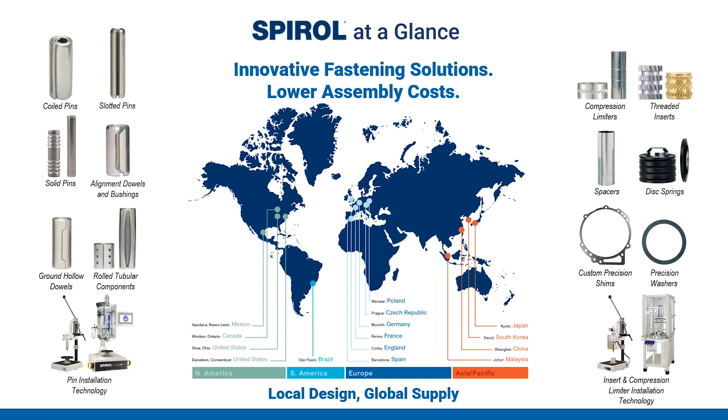To truly understand SPIROL, let's go back in time and relive the story behind the founding of our company. Herman Koehl, a German scientist and engineer, emigrated from Germany to the United States in the late 1940s. After his arrival, he worked for the US Air Force, where he was trying to solve a peculiar problem with fastening the turbine blades to the rotor on early jet engines. The Air Force tried to use bolts and nuts, dowel pins, and a traditional slotted spring pin, but nothing worked as the fasteners kept either failing or falling out of the assembly.

This was primarily due to the vibrations within the assembly, which caused the nuts and bolts to vibrate apart and fatigued the pins or enlarged the hole, resulting in the pin falling out of the hole. In a spark of brilliance, Mr. Kohl tried to take the spring pin concept of the slotted pin and take it a step further to provide more flexibility through coiling a thinner strip. The coiled spring pin's superior flexibility and shock and vibration absorbing properties preserved the integrity of the hole and held the engine assembly intact for the intended life.

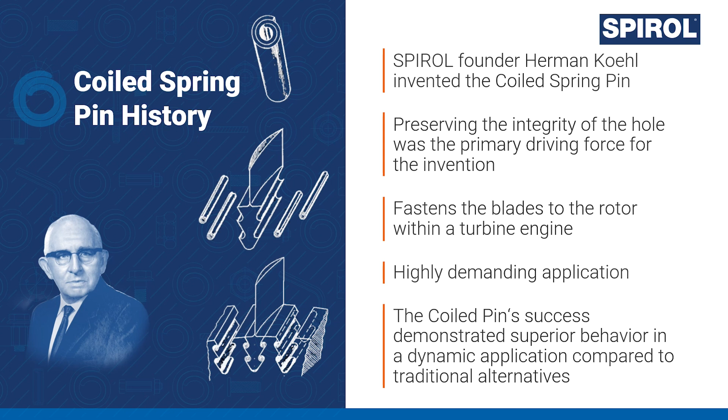After his time in the Air Force, Mr. Koehl took the coiled pin to the market, and the rest is history.

So let's first review the terms and concepts of dynamic applications. We're going to get a little bit technical, so I want to take a minute to explain these terms and make sure everyone understands them.

So what exactly is a dynamic load? Simply put, it is any load that changes over time. This can be either a pulsating force, imagine pushing and pulling onto something repeatedly. It can be a random vibration, like a car driving on a rough road, or it can be a shock or an impact, imagine a hammer hitting something. So when we're talking about dynamic loads, we want to have a complete picture of what is going on.

After determining the type of load, it can be further described by these parameters. Mean stress component, which is the average or middle value of the curve. Amplitude is the amount by how much it oscillates over time, or the peaks and valleys in the graph. And frequency, which is essentially how fast the load changes over time.

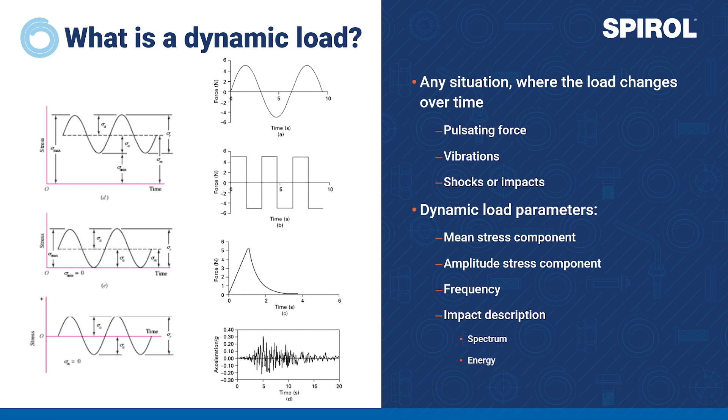And when talking about shocks or impacts, these are best described by how much energy they carry, which would be represented by the area under the curve, and their spectrum. Imagine comparing a hammer hitting an anvil versus a foam stick hitting a mattress. Both of these are impacts, but they have vastly different consequences.

SPIROL addresses dynamic loading in a wide variety of applications. Generally, any powertrain application, regardless of the industry, presents the need for products capable of performing under dynamic loading. Engines, transmissions, gears, axles, differentials, all subject installed pins to some form of reciprocating force or load.

Mining equipment is one example of an industry where pin joints are often subject to very high shear, impact, and vibration. Power generation is similar to powertrain applications, though machines designed for this industry are typically orders of magnitude larger. And due to the scale of these assemblies, SPIROL's wide variety of pins, up to 20 millimeters or 3/4 inch in diameter, are an important capability.

Machine tools and other industrial equipment present a broad spectrum of dynamic applications, wherein dynamic loading can be highly variable, consisting of vibration, reciprocating loads, shocks, or impacts.

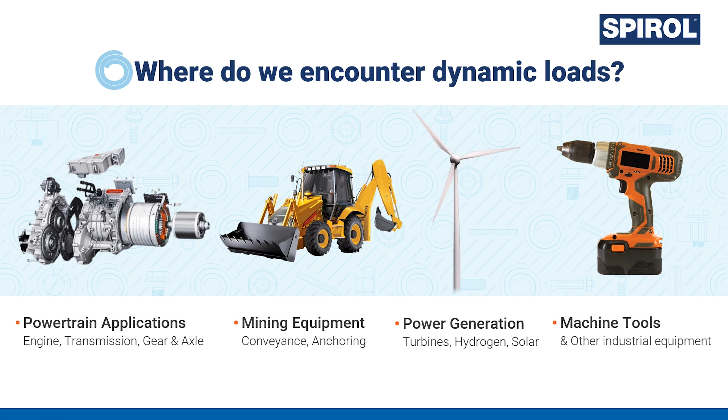So knowing that our application is dynamic and having an idea about the forces that it endures, how do we actually estimate or predict the life of the assembly until fatigue occurs? Well, engineers have a tool for this. It's called the SN curve or Wöhler curve, as seen here on the slide.

And the curve puts the dynamic stress of the application, which is on the y-axis, in relationship to the number of cycles to failure, which is on the x-axis here. Essentially, you can either take the stress in the application and find out just how many cycles it is going to last, or take your desired number of cycles and determine the maximum dynamic stress that would be permissible for that life.

And as you can see on the chart, the curve typically has 3 sections: low cycle fatigue, timed fatigue, and infinite life. Low cycle fatigue is considered to be less than 1,000 cycles, and at that point the stress or fatigue strength is actually very close to its static strength. And with more and more cycles, the strength under fatigue drops.

This is the timed portion of the curve, where we see the life change a lot depending on the stress. However, once we reach 1 million or 10 million cycles or so, the drop in strength levels off, and we have reached what's called the endurance limit, where the life of the application is considered infinite.

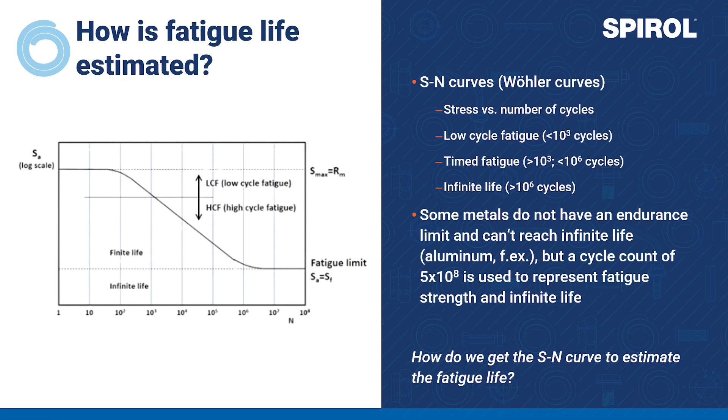Some metals don't have this property, though, and continue to drop in strength even past 1 million cycles. But it is universally agreed that approximately 500 million cycles is more than enough cycles for any application to be considered infinite, and that's what we call the endurance limit with those.

So now that we know how the life of an application can be estimated, where or how do we get the SN curve of a particular part? Well, to fully define the SN curve for something, we only really need the endurance limit.

On the previous slide, we learned that the low cycle strength is not much different from the material's yield strength, and that it kind of drops to the endurance limit after 1 million or so cycles. So the endurance limit is always a portion of the yield strength, and it is specific to material, application, and load cycle combination.

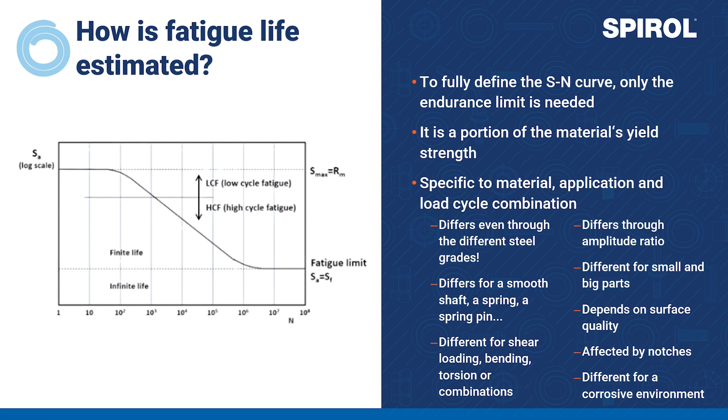And for example, it's different for all grades of steel. It's different for the application type. It's different for the type of stress created by the load, be it shear, bending, torsion, tension, or combinations thereof. The amplitude ratio of the pulsating force makes a difference. The size of the part also affects the endurance. Surface quality and presence of any notches is another factor to consider, as well as any corrosion that might be weakening the part over time.

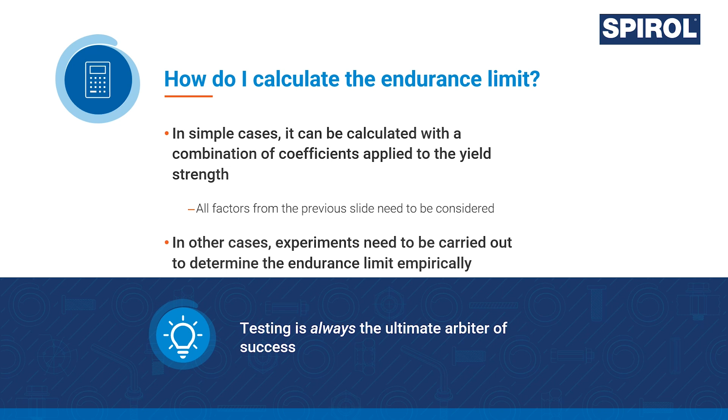So how do we actually calculate the endurance limit? In simple textbook cases, it can be calculated from the material's yield strength and applying all factors mentioned on the previous slide. But with more complex loads, stresses, and scenarios, this calculation becomes lengthy and kind of indeterminate. Therefore, it's often simpler to set up a fatigue test jig and determine the endurance limit empirically, which is directly applicable - exactly what we did for coil pins. But more on that a little bit later.

Let's now take a look at some real-world applications that we have worked on with our customers.

Spiral coiled spring pins are often used to retain gudgeon or wrist pins in pneumatic compressor pistons. Here, the coil pin's ability to self-retain and withstand high vibration and cyclical loading are critical. The coiled spring pin eases hole preparation, installation, and also improves service life.

Another great example is a bucket tooth pin for excavators. Imagine how tough pins must be to withstand loads in the variety of environments where this equipment is used. Here, the coiled pin allows bucket teeth to be pinned rather than welded, greatly reducing the difficulty associated with their replacement.

Also, in heavy construction, though smaller scale, would be the gear and shaft assembly driving a dump truck tarp mechanism. A cross-section is provided of a very typical shaft and collar application here, driving a golf caddy.

It's worth noting that pin chamfers extend beyond the collar, and this is an excellent strategy for ensuring complete engagement where there is clearance available for the ends of the pin.

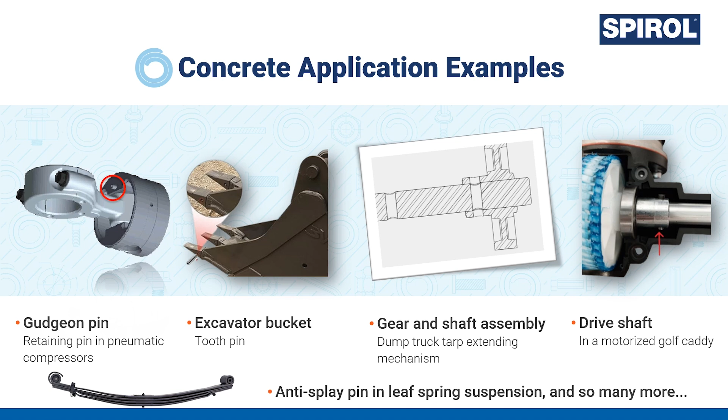Another application where coiled spring pins' dynamic capabilities are realized would be as anti-splay pins in automotive and heavy equipment leaf springs. Here, the coiled spring pins are used to prevent rotation of the individual leaves relative to one another. Given the loads occurring during cornering, impacts due to variation in road surface, and high vibration, this really is a textbook dynamic application.

So with these applications in mind, let's cover the various types of pins that could potentially be used and focus on their unique characteristics. We'll start with solid pins.

This product's great pitfall is its inability to absorb shock, as it is a solid object. In addition, host holes must often be reamed and precision matched, as a very slight change in interference or fit will have a tremendous impact on installation force and potentially performance.

It's always recommended solid pins be harder than the host material, and under reciprocating load, reversal of forces can incrementally displace the softer host material, eventually elongating the holes. As a result, shock from force reversal will be amplified, leading to ever-increasing deformation.

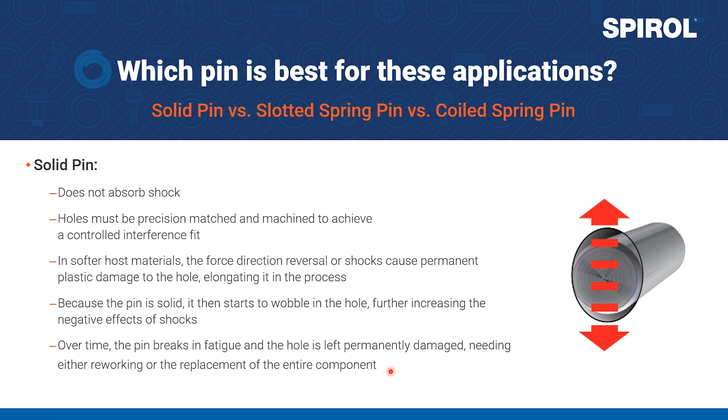Eventually, the pin will fail in fatigue, and the hole will be left permanently damaged. A damaged host hole would require rework and potentially replacement of the entire component.

The next available option is the slotted spring pin. As this solution is a functional spring, it does absorb shock, though its ability to do so is limited by the width of the slot once installed in the hole.

Once the slot closes, it functions as an inflexible solid tube with the same consequences associated with the solid pin, meaning potential for permanent hole damage.

A benefit in comparison to the solid pin is that spring pins do not require precision machined and matched holes, as due to the pin's flexibility prior to installation, much wider hole tolerances can be accommodated.

The slotted pin's pitfall is that its performance largely depends upon the orientation of the slot being in line with the load, and it's not always possible to automate slot orientation in high volume production.

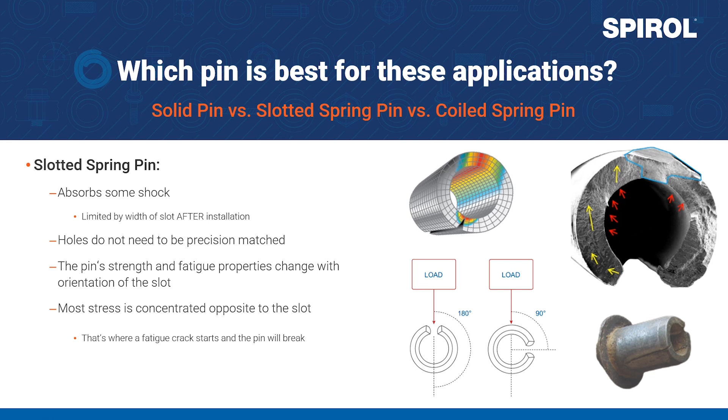In addition, stress in a slotted pin is concentrated directly opposite the slot, much like the binding of a book. It is this location where fatigue cracks will appear and further propagate. When slotted pins fail in fatigue, the application must be serviced, though often host parts can be reused.

The coiled pin was specifically designed to absorb shock and vibration beyond that which the slotted pin is capable of. Its unique 2¼ coil formation allows for greater spring response compared to slotted spring pins, which can butt. A coiled pin's inner coil can continue moving, allowing for much greater flexibility.

As with the slotted pin, holes do not need to be precision machined, but unlike slotted pins, coil pins do not have or possess the same Achilles heel, as stress is much better distributed uniformly through its cross-section.

This also means radial pressure exerted on the hole is uniform, which prevents host damage and allows for repeated use. The other benefit of the 2¼ coil formation is that performance is independent of pin orientation. It is also available in 3 duties, light, standard, and heavy, which allows the designer to select the optimal combination of strength and flexibility for their specific application.

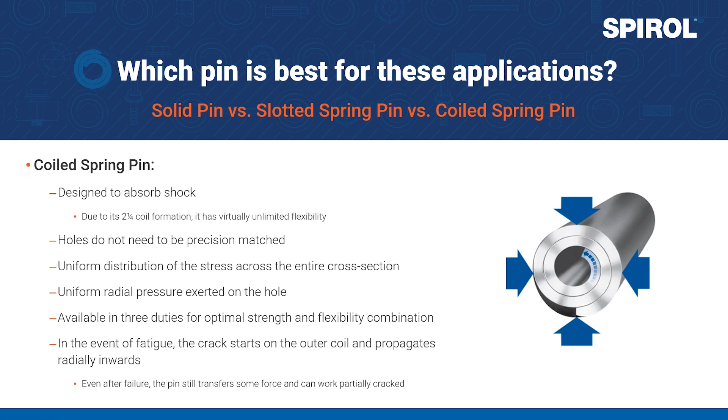Should the coil pin crack due to fatigue, which will require more time than competing products, cracking will propagate from the outer coil, typically within the shear plane, slowly working its way inward. As that crack progresses through the coils, the coil spring pin will continue transferring loads until its cross-sectional area is reduced to the point at which shear occurs.

So how do pins compare in numbers? We've performed in-house experiments supervised by renowned academic researchers on a machine which simulates a reciprocating shear force acting on the pin with adjustable load. In a scenario where the dynamic load was 50% of the pin's overall strength, the coiled spring pin lasted approximately 5 times as long as the slotted spring pin on average. Not only that, a clear increase of the overall endurance limit was also observed, which means that for the same force and nominal diameter, a coiled pin can achieve an infinite service life, whereas a slotted pin will fail prematurely.

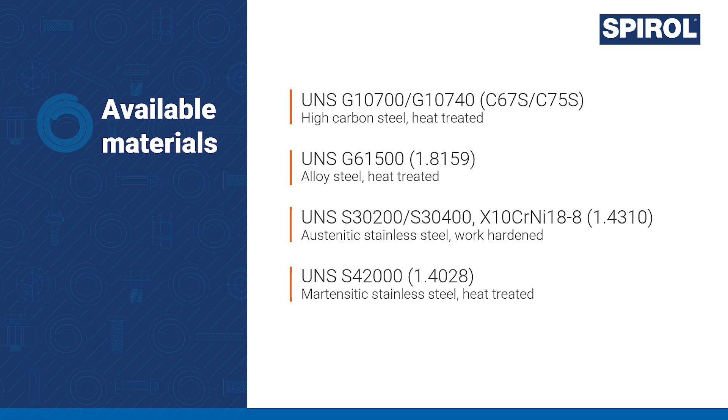Another factor determining service life of the application is pin material. Coil pins are available in high carbon steel, chrome vanadium alloy steel, and 2 kinds of stainless: austenitic nickel stainless steel and martensitic chrome stainless steel. Some of these materials are heat treated, which improves overall performance and consistency of spring characteristics.

Heat treating provides higher shear strength and hardness, resulting in pins that are suitable for use in hardened host components. In terms of operating temperatures, once heat treated, these materials will provide proper performance at temperatures ranging from -45 to 150 Celsius, or -50 to 300 degrees Fahrenheit for high carbon steel and alloy, and as high as 260 degrees Celsius or 500 Fahrenheit for the martensitic stainless steel.

Austenitic stainless steel cannot be heat treated, and it work hardens as it's cycled. As a result, this material does not absorb shock well, and it's not recommended for use in applications where dynamic loading is present. Austenitic or 300 series stainless steel has lower shear strength and hardness as compared to the carbon and alloy steel, as well as the 420 chrome. In addition, this material is generally not suitable for use in hardened components.

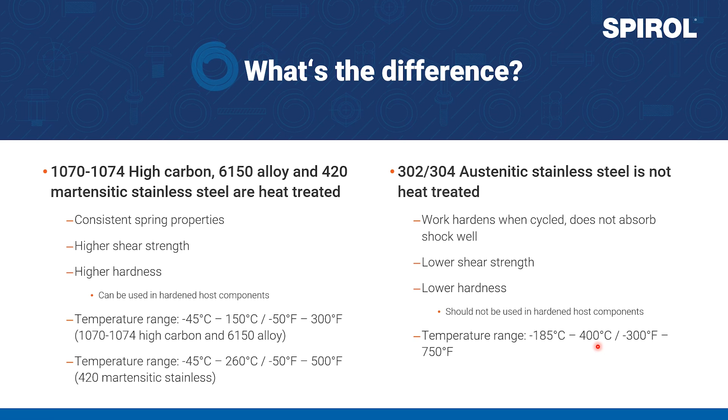As high temperatures do not significantly affect this material's mechanical properties, it can be used in a wider range of temperatures than our hardened materials. And the effective range for this material is -185 Celsius to 400 Celsius, or -300 Fahrenheit to 750 degrees Fahrenheit.

The main difference between these materials is in their comparative endurance. As we mentioned earlier, we developed a general relative SN diagram for coil pins. We've spent hundreds of hours rigorously testing the pins to record single data points at 1 million cycles plus. The provided diagram is generally acceptable or applicable to all pin sizes, and the principles carry over to other duties as well. We can see that with high carbon steel, infinite life is achieved at loads below 12% of the total rated shear strength of the pin.

Austenitic's performance is worse, at only about 8.5% of its total shear strength, and keep in mind its shear strength is lower to begin with. Martensitic stainless steel outperforms even high carbon steel and can reach infinite life at as much as 16% of its total shear strength. These are general numbers for a very general scenario, and as we've discussed, even slight changes to operating conditions will yield different results.

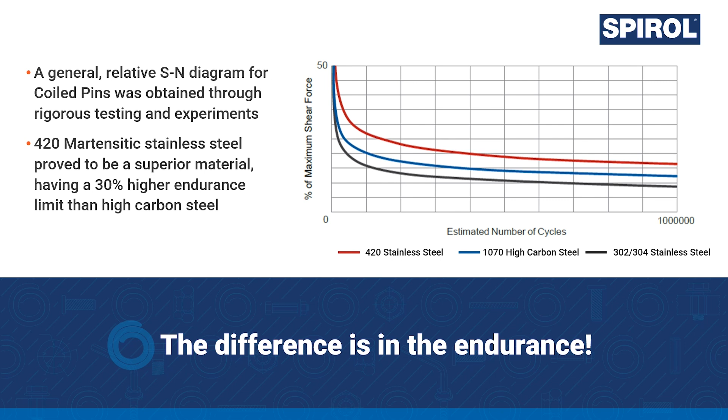Nevertheless, they remain a good starting point when selecting pins for use in dynamic applications. We would recommend sizing pins such that load not exceed 10% of their rated shear strength in most dynamic applications where infinite life of the assembly is desired.

So all that we have talked about today was in reference to achieving the ultimate goal, to maximize life of an assembly. We've already established that coil pins are superior for dynamic applications. Well, what else can we do? Let's put that into some more concrete design guidelines. Generally, we should always get a more durable material and minimize stress. But how do we do that?

A couple slides back, Mike was talking about the SN diagram that we have developed for the different materials of coil pins, where you could see a higher endurance limit of the 420 martensitic stainless steel. This is the favorable material for dynamic applications, even in environments where corrosion resistance is not of an explicit concern. Where there is general atmospheric corrosion, the added benefit of corrosion resistance will prevent the surface from corroding and creating local stress raisers, which would compromise the service life.

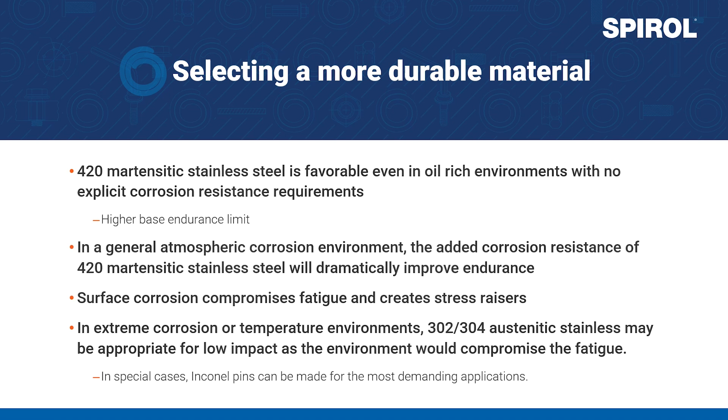The increase in service life by switching to 420 martensitic will be dramatic. But martensitic stainless steel is not the solution for all applications. In extremely corrosive or high temperature environments, the better corrosion and temperature resistance of austenitic stainless steel would actually function slightly better. And in the most special cases, we can also look into using 316 stainless steel for its even superior corrosion resistance, or even Inconel for some of the ultra high temperatures or sour gas environments.

Changing the material of the pin is usually the simplest change that can be made. After that, it's all about minimizing the stress. Without going into more severe design changes, it's worth investigating the forces that act on the pin and if they could be optimized. Obviously, if we could just lower the force that acts on the pin, that would be best, but that's usually non-negotiable.

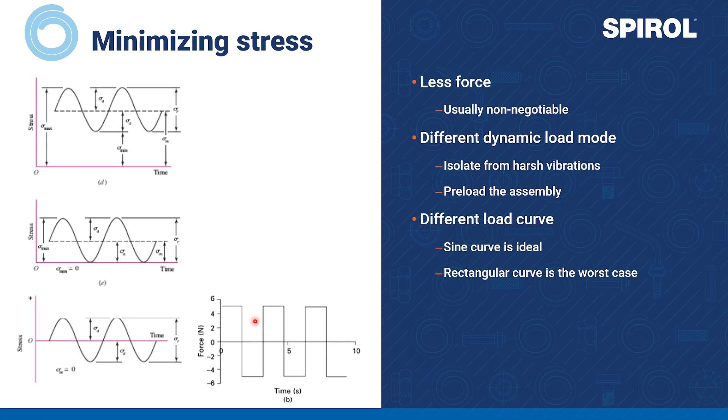What could be done, however, is changing the dynamic load mode by isolating the assembly from harsh vibrations and preloading the assembly. The principle of preload is widely used in dynamic applications. The coefficient that determines the endurance limit is most favorable with a pulsating force, as opposed to an alternating force. The load curve also plays a role. A sine curve is the most gentle on the application, whereas a rectangular pattern is essentially a series of repeating shocks and impacts.

After that, we can take a look at increasing the amount of pin material. More material means a larger cross-sectional area of the pin and therefore less stress. We can either increase the pin diameter itself while still staying within the geometrical constraints of the application, which, for example, in a shaft and hub assembly, the pin diameter should not exceed a third of the shaft diameter.

Another option is to move to a heavier duty pin. Before making the move to a heavy duty pin, though, we need to make sure that the host material is sufficiently hard and strong to accommodate it. If we used heavy duty in aluminum, for example, the comparatively high stiffness of the pin would have essentially the same consequences as a solid pin, and the service life could actually be decreased. Generally speaking, it's better to go to a larger diameter standard duty pin before moving to a heavy duty pin, except in very specific applications.

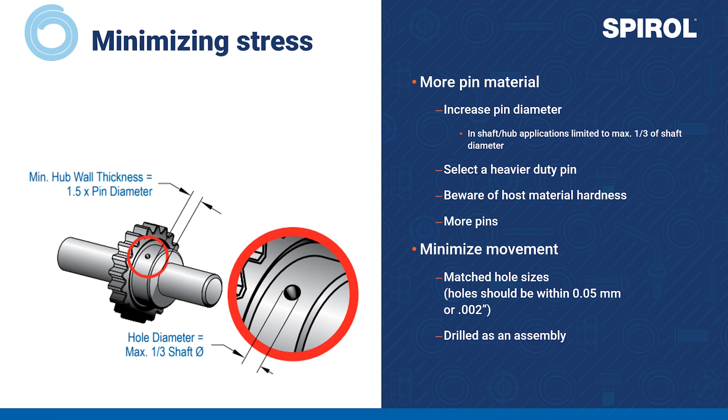Another great improvement can be made by minimizing the movement on force reversals. To accomplish this, hole sizes between mating components should be matched so that no part would have an excessive clearance that would result in shocks during force reversals. Ideally, the holes would be drilled as an assembly to have a uniform diameter, but a maximum difference of 0.05 millimeters or 0.002 of an inch should be targeted if that is not possible.

Last but certainly not least, you should always minimize shear plane separation to achieve a clean shear load. The shear planes should be a maximum of 0.13 millimeters or 0.005 of an inch apart from each other, which is represented by clearance in the hub and shaft assembly, for example. The more clearance and the bigger the distance, the more it introduces additional bending stress. To elaborate, if shear planes are separated by 2 millimeters, a 4 millimeter heavy duty coil pin would see an increase of combined stress of 28%.

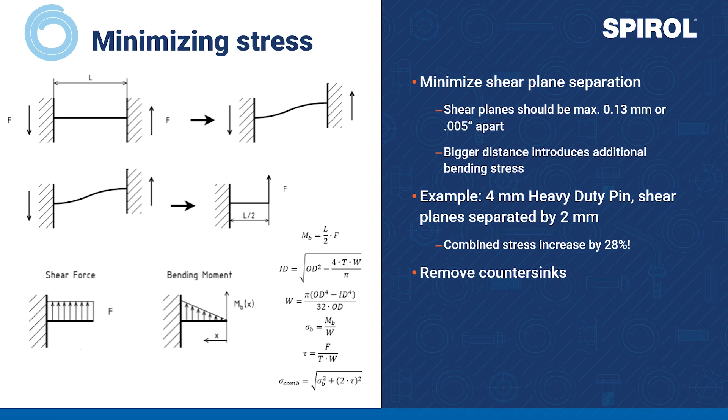Now, you may think that having a 2 millimeter clearance between hub and shaft isn't possible, and you would be right. But if there is a 1 millimeter countersink on each side of the hole, that creates essentially the same effect. Countersinks should be removed from wherever shear occurs.

This may have been a lot to ingest in one sitting, so let's summarize the key takeaways here. First, we've demonstrated that coiled spring pins are the superior fastener for dynamically loaded applications. So whenever you identify that an application will have a changing force over time, consider using a coiled spring pin.

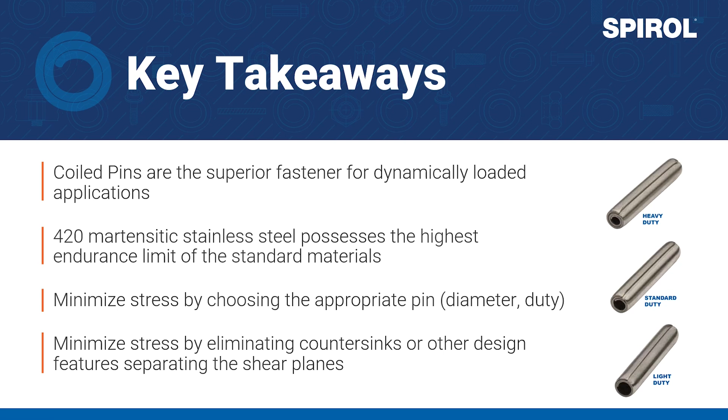In regard to pin material, 420 martensitic chrome stainless steel will provide the highest endurance limit as compared to our other standard materials. This includes high carbon steel, even when comparisons are made in oil-rich environments where corrosion is not of concern. To maximize service life of the assembly, minimize stress on the pin by selecting the most suitable diameter and duty, as well as eliminating any unnecessary countersinks or other design features that separate the shear planes and introduce bending.

And to put that into practice, I have a great example that will illustrate just how the different types of pins react in dynamic applications. A manufacturer of agricultural equipment attachments contacted SPIROL because they were experiencing fatigue failures with their current slotted spring pin in a hay rake assembly.

The pin is used to retain this hub into this shaft here. What I love about this application particularly is that the solution is totally contrary to what you might think would be the solution when it comes to pinning.

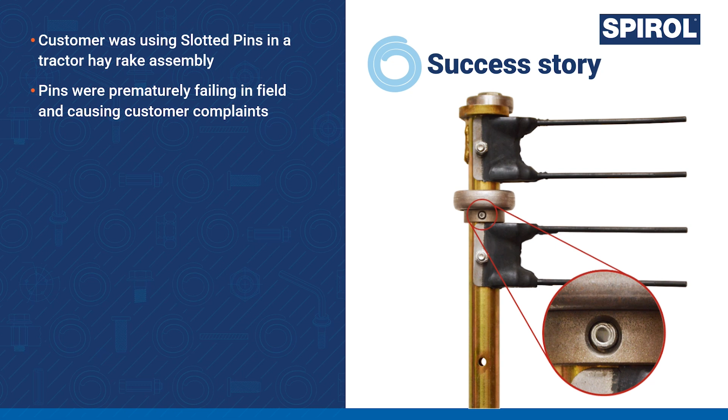They contacted SPIROL because they had read that coil pins had better service life, especially in dynamic applications, and declined SPIROL's complimentary application engineering assistance, simply requesting samples of a heavy-duty coiled spring pin, the same size they were using with the slotted spring pin.

A few weeks later, they contacted SPIROL again, this time to actually request the application engineering assistance. They said the heavy-duty coiled spring pin also failed in the application, so they tried a heat-treated solid pin, thinking they needed an even stronger pin for the assembly, and that failed too.

Upon reviewing the application, SPIROL Engineering quickly learned that the host material in which the pin was used was non-heat-treated cold-rolled steel. The failed assemblies were evaluated, graciously provided by the customer, to determine the root cause of the failures.

In each instance, we found that the hole in which the pin was used was elongated. All of the pins that failed in the hay rake assembly - the slotted spring pin, the heavy-duty coil spring pin, and the heat-treated solid pin - were actually too stiff for the soft material.

The result was that as force was applied on the pin, none of these pins were flexible enough to absorb the shock and vibration, and the pin simply transmitted the force onto the hole wall, resulting in deformation.

Once the hole was elongated, any force on the pin was exacerbated due to the movement of the pin within the widened hole on force reversals. This was further compounded by a large countersink on the entrance to the hole, which introduced additional bending stress on the pin.

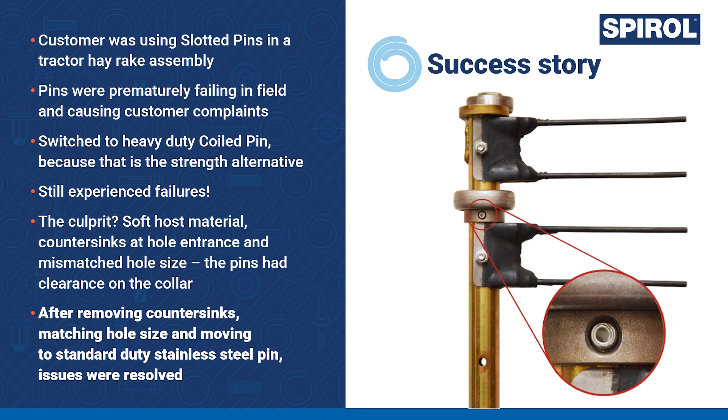SPIROL recommended that the hay rake manufacturer change from a zinc plated high carbon steel pin to a plain 420 martensitic stainless steel. The 420 stainless provides great corrosion resistance in this application without any need for subsequent coating or plating. And as we have established, 420 stainless has superb fatigue resistance in dynamic applications.

If you're working on a new design, involve SPIROL as early as possible. We will conduct a comprehensive evaluation of your application and then provide you with a detailed engineering report, complete with samples for testing and approval.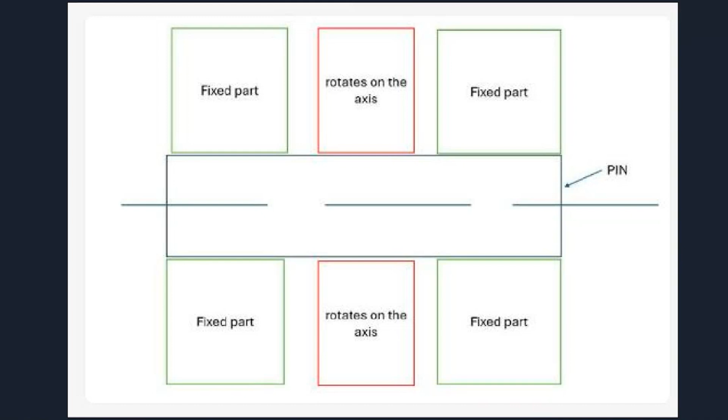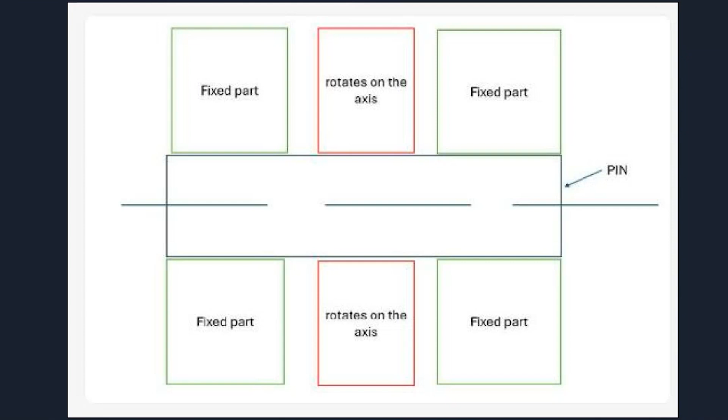Absolutely. This is one of the use cases that we see all the time. To use a coil pin in a situation like this, you are retaining the pin in whichever part has more material, and it always needs to be at least, if we're talking about the outer parts, 1 to 1.5 diameters thick, so the pin has enough interference to properly self-retain in the assembly. When that is retained on the outside and the inner part is supposed to rotate freely, it needs to be sized so that it always has clearance with the pin.

Because of the nature of spring pins, they are larger than the hole when pre-installed, and once installed and they exit out the hole, they become slightly reduced in size, though they will recover a portion of their original diameter. That is something we need to account for in the midsection of that hinge, so it doesn't bind up or introduce unwanted friction. So we do have internal charts that help us calculate the hole size difference for the outside and inside parts in order to achieve that objective.

Okay, a follow-up question to the low temperature material question. Do you have test results for coil pins and slotted pins for temperatures as low as -40 Celsius?

No, we do not. We would make our recommendations based upon research of those materials' properties, and those are widely available. So, for example, if you have a cryo application where there isn't heavy cyclical loading, etc., then an austenitic stainless steel pin, as we had previously presented, might be a really good choice for you.

Conversely, we can also manufacture special parts out of Inconel. Inconel can be heat treated in two different ways: we can either heat treat it for use in a cryo environment, or heat treat it for maximum strength at elevated temperature. To that end, we would base that upon individual case studies for your application and look at the material and study its properties at the temperature you desire to determine whether we can, number one, form it properly so it's manufacturable and cost effective.